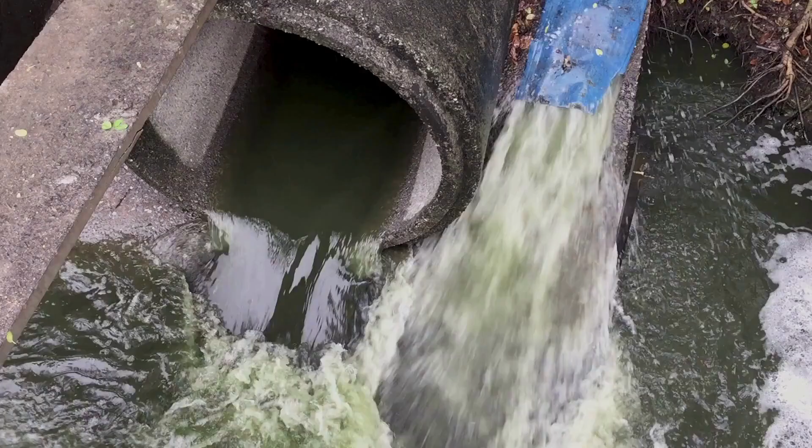On December 6, 2022, the State Water Board adopted Statewide General Order 2022-0103-DWQ to replace existing General Order 2006-0003-DWQ. The reissued order is in effect as of Monday, June 5, 2023. It builds upon waste discharge requirements from the 2006 General Order. It updates and clarifies compliance expectations for the 16-year-old order.

It was reissued to address spills to waters of the state, which includes surface waters and groundwater within boundaries of the state. It also seeks to address climate change impacts on a system-specific level and rising sea levels.

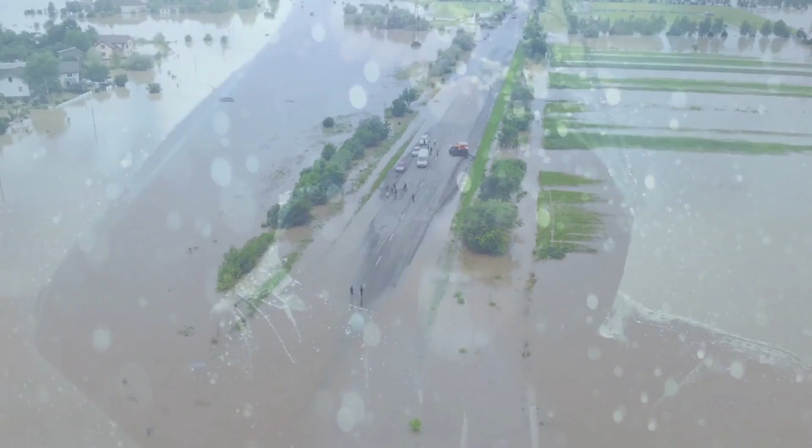Lastly, this order clarifies enforceability of the order through full electronic reporting into the California Integrated Water Quality System, also known as CIWQS, so agencies better understand how to meet the requirements of the General Order. Let's explore its format. Let's look at what you will find in each section, one at a time. The main body of the order contains 6 sections.

Section 1, the introduction, provides the purpose. And it clearly defines the terminology used so everyone is on the same page. We'll review some of the key terms together. We'll start with the definition of a spill. A spill is a discharge of sewage from any portion of a sanitary sewer system due to a sanitary sewer system overflow, operational failure, and/or infrastructure failure.

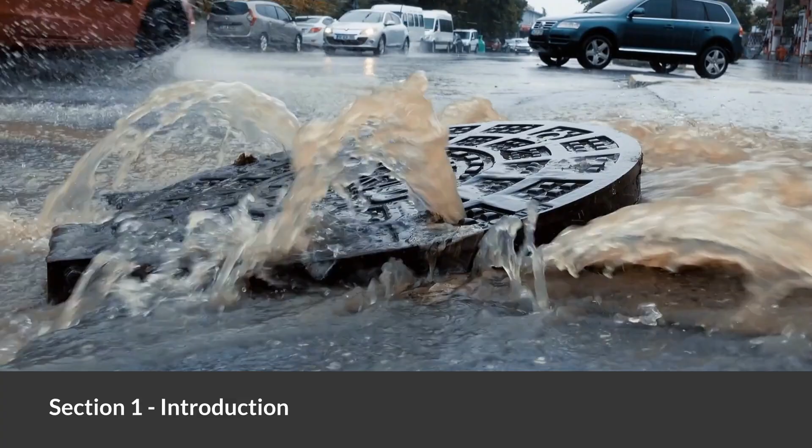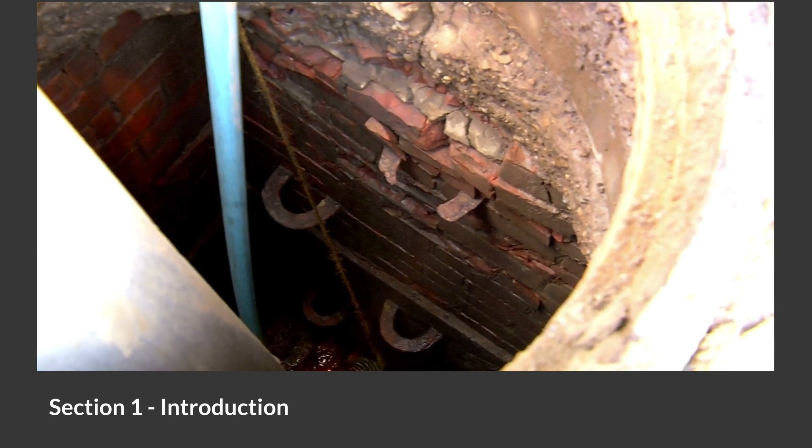You may be familiar with the term SSO or sanitary sewer overflow. It's important to note in this order that SSOs are a subset of spills, and not a spill itself. Spills can also be caused by operational failures such as a pump station failure, or an operational failure that occurs due to maintenance activities. Spills may also be due to infrastructure failure in any part of the collection system.

Let's define sanitary sewer systems. Sanitary sewer systems include the main body of the system plus laterals owned and/or operated by the enrollee, satellite sewer systems, temporary conveyance, and storage facilities. This includes but is not limited to temporary piping, construction trenches, vaults, wet wells, impoundments, and diversion structures. Lastly, we'll define an enrollee.

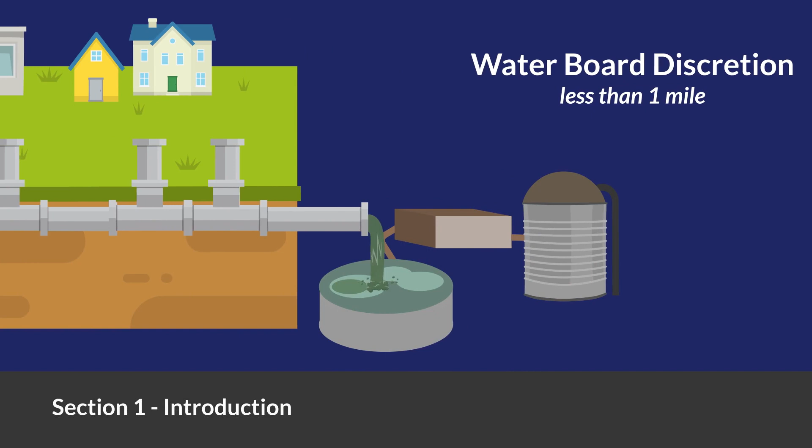Enrollees are public agencies that own and/or operate sanitary sewer systems greater than 1 mile in length. Public agencies that own and/or operate systems 1 mile or less, upon Water Board discretion. Federal facilities, non-governmental and private owners of any size system, where the Water Board requires regulatory coverage. Public agencies include state agencies, municipalities and special districts.

Section 2, Regulatory Coverage and Application Requirements. This section explains how existing enrollees certify for continuation of regulatory coverage. It also provides application requirements for new enrollees. Section 3, Findings. This section outlines the board's basis for updating order requirements. While this section provides the basis for updating requirements, it does not, however, contain enrollee requirements for compliance. Those are found in Section 5 specifications along with attachments D and E.

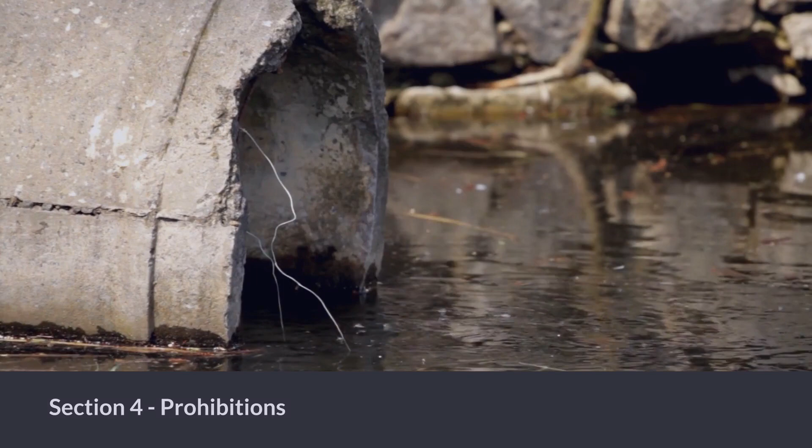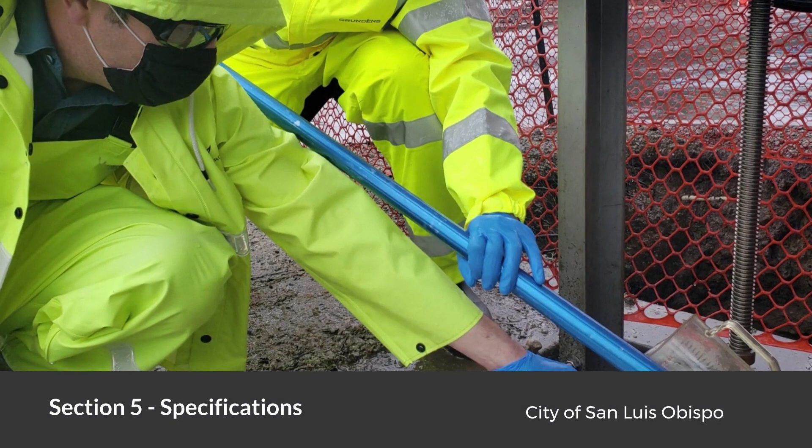Section 4, Prohibitions. Section 4 describes the discharge prohibitions of this general order. Section 5, Specifications. It specifies the requirements placed on the enrollee. Section 6, Provisions. Information about current regulations, administration matters, Water Board enforcement discretion, violations and other administrative matters are explained here. Lastly, there are attachments. Since they are an enforceable part of the order, let's look at each one.

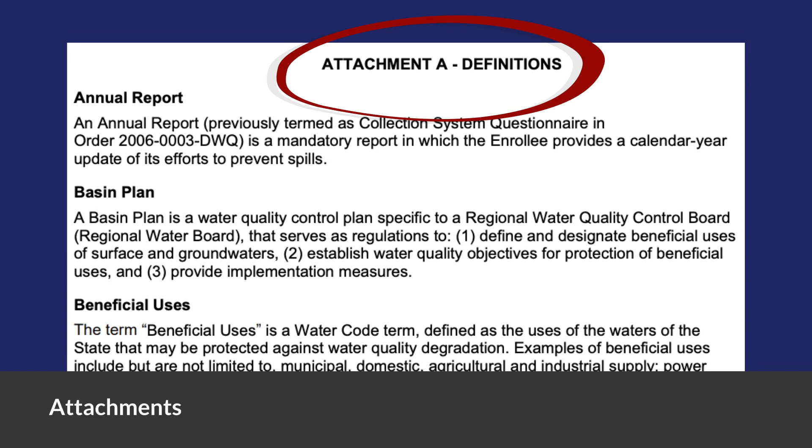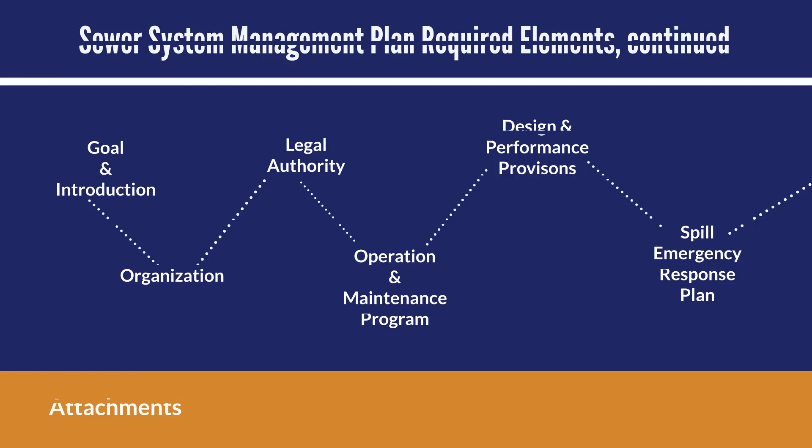Attachment A contains definitions. The major terms used in the order are defined here. Attachment B is the application for enrollment. New enrollees seeking order coverage must submit this form as part of their application package. Attachment C is the notice of termination. This supplies existing enrollees with the template to request termination of coverage. Attachment D, Sewer System Management Plan, Required Elements. This section provides detailed information regarding the 11 required elements of a sewer system management plan.

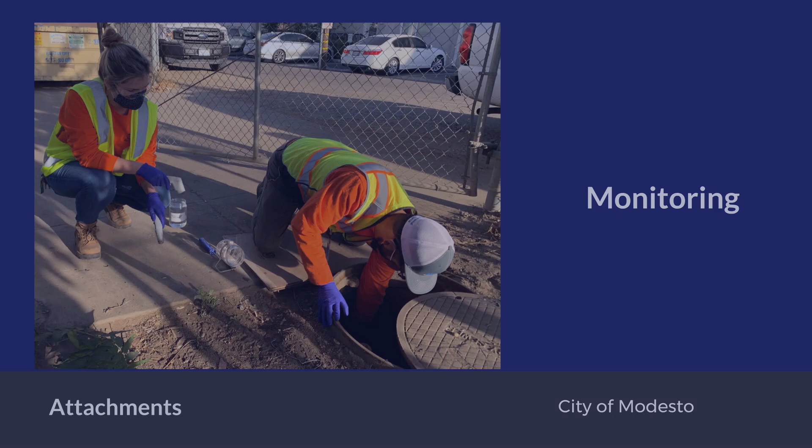Attachment E1 is for notification, monitoring, reporting and record keeping. It provides the requirements for spills, including the notifications, monitoring, reporting, and the record keeping requirements for enrollees. Attachment E2, Summary of Notification, Monitoring, and Reporting Requirements, provides enrollees with a quick reference table of the requirements for each spill category. And Attachment F provides Regional Water Quality Control Board's contact information.

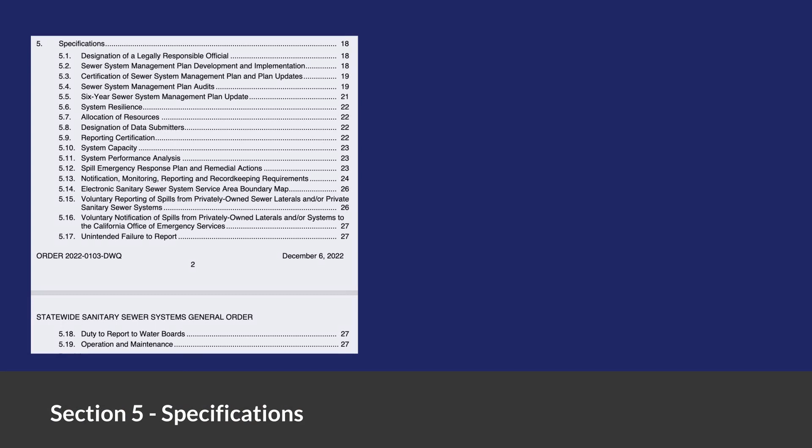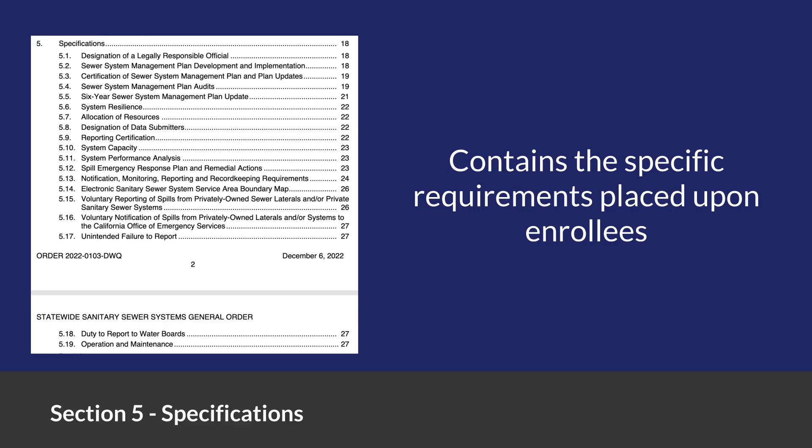Let's explore the requirements for existing enrollees more closely. Section 5, Specifications, contains the specific requirements placed on enrollees. It is key to complying with this order. For added detail, clarity and instructions, specific order attachments are referenced. Let's look at some key components of Section 5 grouped in related topics. Sections 5.1 and 5.8 detail requirements for designating legally responsible officials and data submitters. Section 5.9 covers the reporting certifications for legally responsible officials.

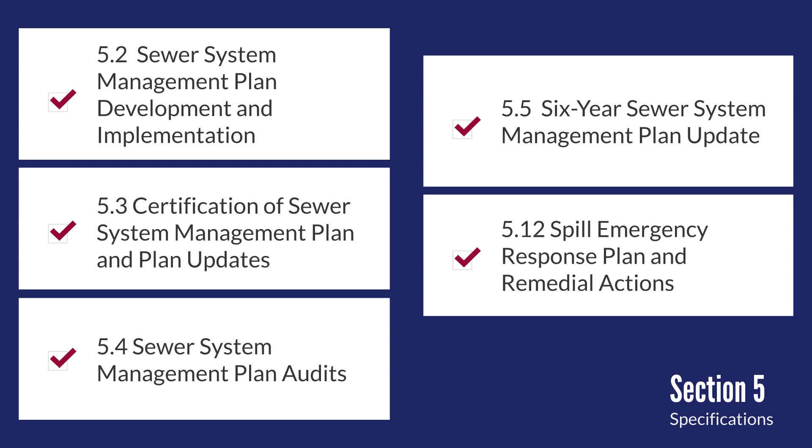Together, subsections 5.7 and 5.10 detail requirements to maintain system capacity and resources to manage the sanitary sewer system. Sections 5.2 through 5.5 and Section 5.12 all detail the requirements and the due dates for development of the Sewer System Management Plan, plan audits, and Spill Emergency Response Plan. 5.6 details requirements to prioritize system operation and maintenance, condition assessment, and repair and rehabilitation programs to address ongoing system resilience.

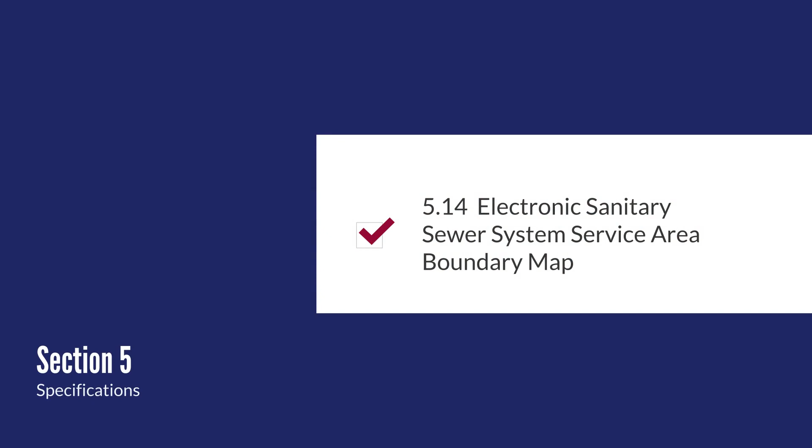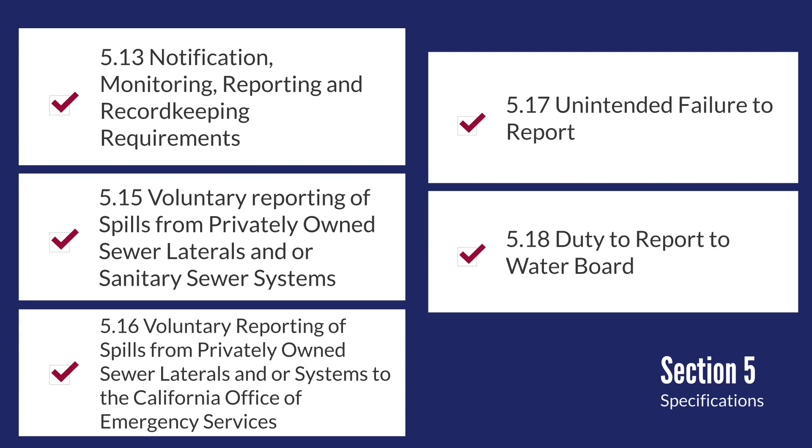5.11 explains the specifications for submitting the system performance analysis graphs in the enrollee's annual report. 5.14 details the spatial boundary map submittal requirements. Sections 5.13 and 5.15 to 5.18, together they specify the notification, monitoring, reporting and record-keeping requirements of the General Order. 5.19 specifies the requirements for system operation and maintenance.

This order was updated to better protect our beneficial uses of the waters of the state and address climate change impact. Remember, there are 6 sections and attachments. Section 5, Specifications, along with attachments D and E, contain the requirements for enrollee compliance.